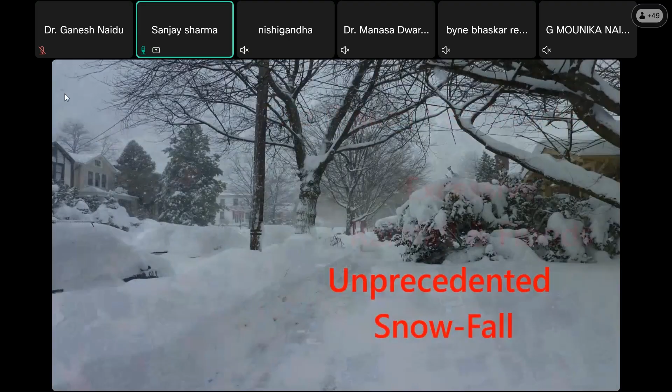...it is happening in a shorter period, so we are getting a lot of water, and that is not leading to providing a good city environment.

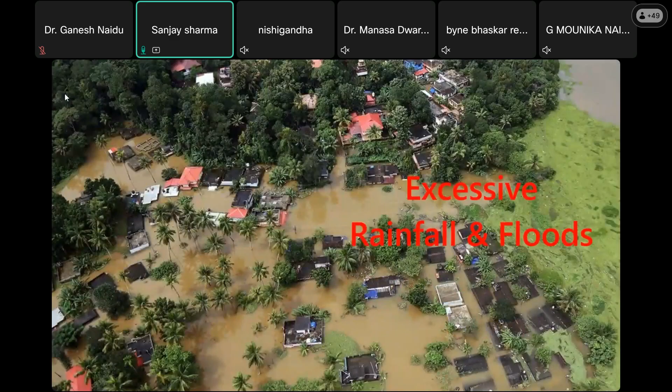Floods are very common in cities, and wherever fires and wildfires are there, I think the recent example of Los Angeles is in front of us. So we are experiencing intense heat waves, and that is what is happening.

Our global temperature now, even the news was there, okay, we want to bring it down by 2 degrees centigrade, but it will rise. It may not be possible to control.

With the US opting out and all that, it may not be possible to achieve the target of lowering the global temperature by 2 degrees centigrade. So that is the thinking.

We are having pollution, and burning of crops is a major issue, particularly in northern India and Punjab. We start hearing about this from October end, and it continues up to January end. It is all contributing to our lifestyle, where we have burning of waste, burning of crackers, and we are already experiencing huge acute water shortage.

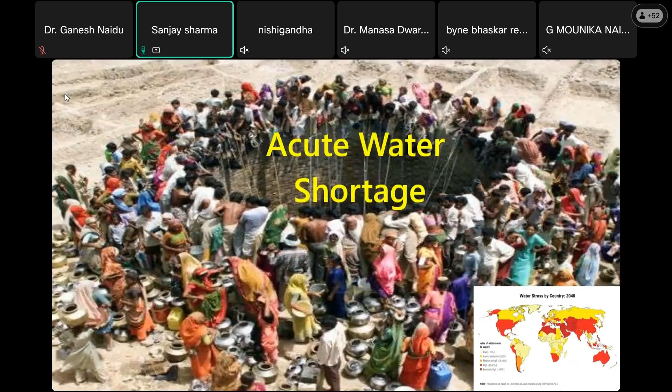The CO2 emission was very low in the late 60s or so, but it has gone very high. I think there is almost a 45% increase in CO2 concentration within a few years only. And India is the worst affected.

I think we have about 15 cities which are the worst cities with respect to air pollution in the world. Kanpur and Delhi are there, and this time Chandigarh, which is considered a very green and beautiful city, with the highest green cover as compared to any city in the country, was the second most polluted city in the country after Delhi.

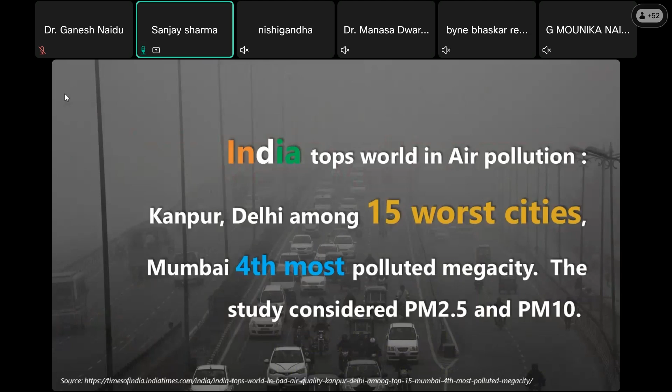So this is what is happening. It is not that we can control it by having one particular measure. I think a lot of things are required to be done.

Whenever there are some control measures, the building or construction sector is the first one to be stopped during that particular period, because of this issue. So that is what we want: cleaner water, cleaner air.

If you compare the Corona period, what was the condition during that time? It was very, very understandable that most of these activities are happening because of our lifestyle. We are doing that.

So it is our duty to protect the environment around us, and in that direction, automation or construction of green buildings is one of the things.

Green building means, I hope everybody understands what a green building is. A green building is nothing like just planting trees around the building and calling it a green building. No. Green building means we are taking a combination of measures.

And cities, you can see how big buildings, their construction practices and materials have changed. You can see different building forms, different multi-story buildings everywhere, high rise buildings. Same way in Mumbai, same way in Kolkata, every bigger city.

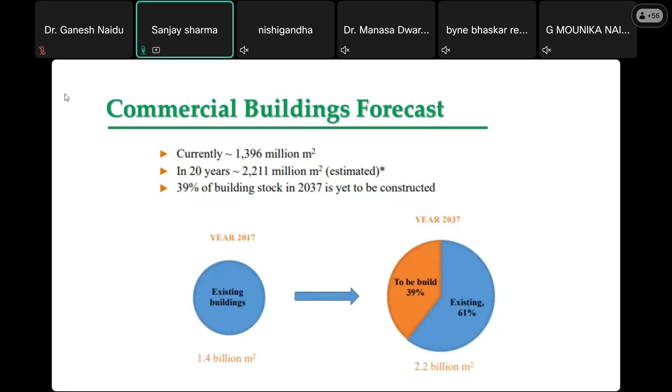But still, if we consider our building sector, we are still far away from our needs - only 60% of built area has been provided. Remaining is still to be built. 60% existing is there, but in another 10-15 years we need 40% more.

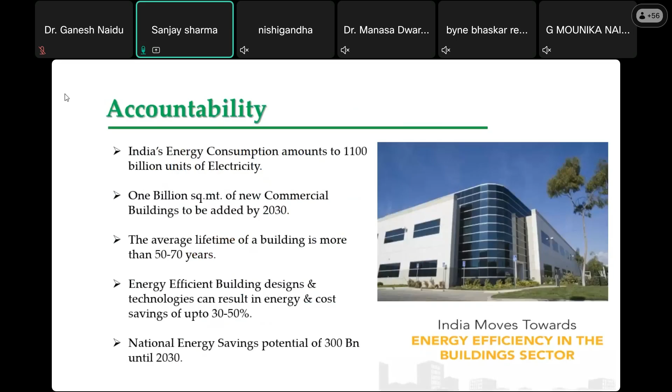This building sector is basically contributing a lot towards pollution, global warming, and carbon dioxide emission. So we need buildings which are energy efficient, which are green buildings, and there is responsibility for each and every person.

Policy makers, engineers, architects, civil authorities, government, NGOs, developers - all these persons are responsible for carbon dioxide emission in buildings, and their responsibility is to control that emission and go for green construction.

One of the parameters is automation, because if we are using AI in the building sector, that means we will be able to control things, predict outcomes, and adopt sustainable practices in building construction.

Energy efficiency is also one of the factors. Every country in the world has its energy codes, and in many places it is mandatory, in many areas it is voluntary, and mixed. In India also now, I think it is mandatory in many places.

If your electricity load or construction area is up to a certain minimum, they have already established codes and you cannot construct otherwise. Every state has its own ECBC code, because energy efficiency code depends upon the climate - so each climate zone, each state has come up with its own ECBC code.

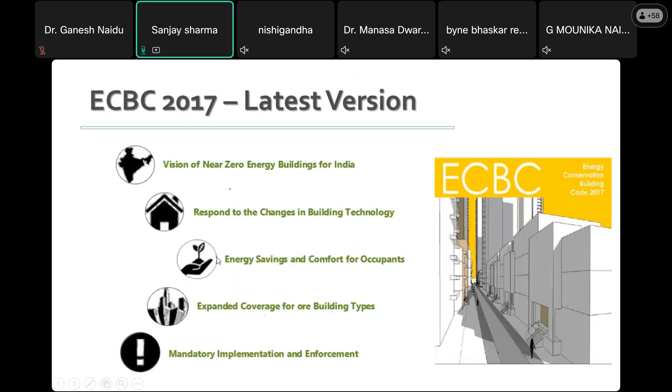The goal is to achieve near zero or zero energy buildings, where a building responds to changes in construction practices, achieves energy saving while providing good comfort to occupants, expands coverage for building types, and ensures mandatory implementation and enforcement.

The components of energy efficiency include the building envelope - fenestration, orientation, etc. - and comfort systems and control. It's important how you provide automation or use AI applications in buildings, how you control lighting, and what system you use for renewable energy sources in a particular building.

If we are saying photovoltaics are being used, I can give the example of Chandigarh city. Chandigarh city has already achieved its target of 30% energy through solar energy.

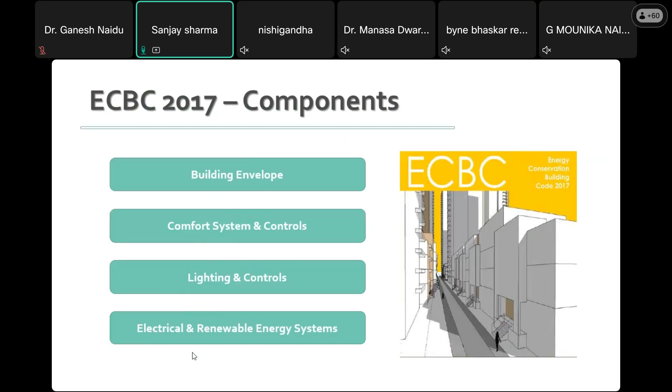It was to be done by 2030, but already it is going beyond that. Now almost every house is being provided with solar energy, and they have used a net metering system here. Whatever energy is generated through net metering goes to the grid, and then through net metering, it basically provides you the payback for the energy you created. So this is important that we do that.

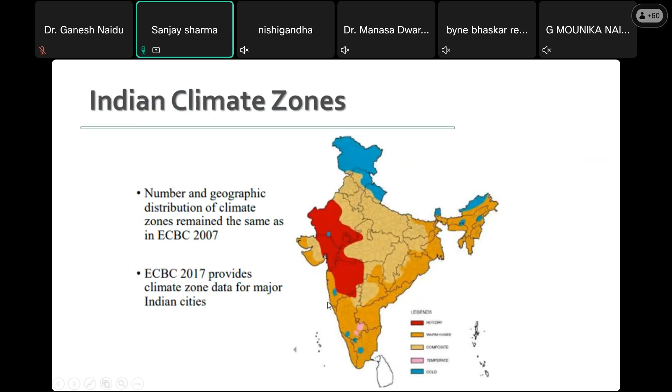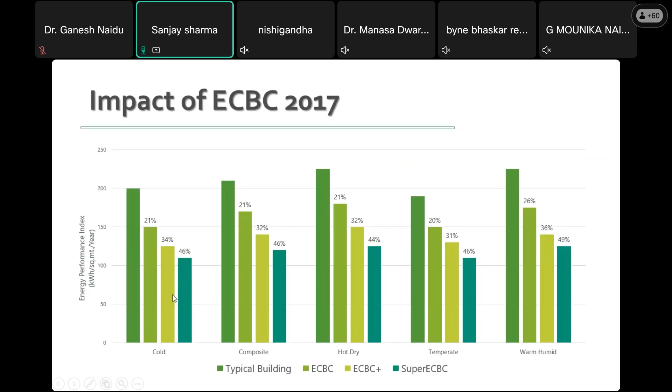And these are the five climate zones in our context. For each climate zone, you have your ECBC code. Every state has its own ECBC code, basically. And you can see that this scenario is changing. In all the particular types of climate, the ECBC-based building construction is going up.

So construction of green buildings, or sustainable buildings, if you define it, is the practice of increasing the efficiency with which buildings and their sites use energy, water, materials, and have reduced impact on human health and on the environment for the entire life cycle of a building.

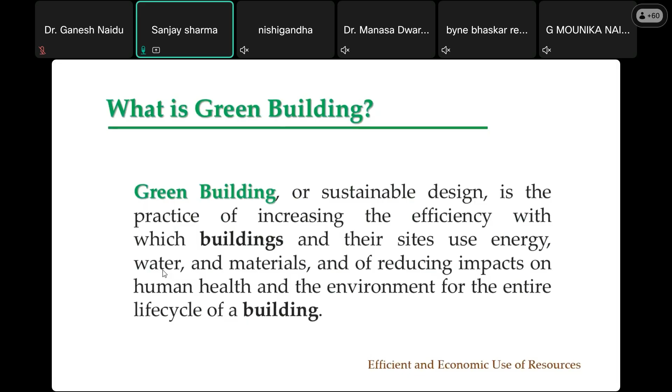So that means we want to have a building in such a way that it uses less water, optimizes the use of energy, at the same time conserves natural resources, generates less waste, and provides healthier spaces for the occupants.

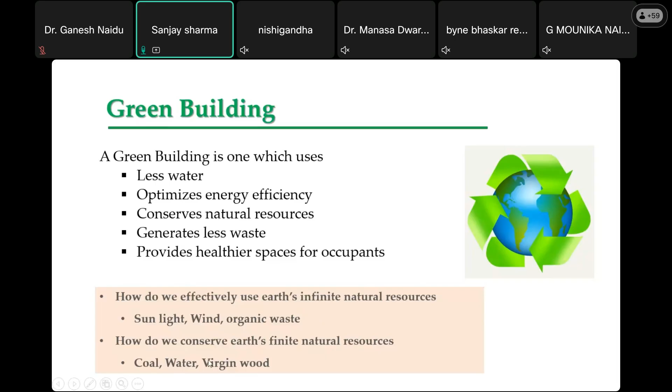So we have to see how we can use natural resources like sunlight, wind, or organic waste, and how we conserve resources like coal, water, and wood, etc., while carrying out construction practices.

So the benefits are: environmental benefits, social benefits, and economic benefits. Environmental benefits include improved air quality, reduced waste streams, and conserved water sources. Social benefits include enhanced occupant health. Economic benefits include reduced operating cost, tax incentives, they create, expand and shape markets for green products and services, and improve occupant productivity.

So many people ask, why should we do this, because construction of a green building is costly. Initially you may be spending more, installing solar panels, or if you have a multi-story building with water automation, those things add cost to the building construction. But the payback is about 3 to 5 years.

After that, economically you are positive. You are not spending anything on energy, and water is being recycled and reused.

If you look at the national building code, whenever you go for any multi-story or any building of a particular size, you have to show that your net water balance is zero. No wastewater - you are not allowed to get a connection to the sewage line. Whatever water you generate has to be reused in your locality only.

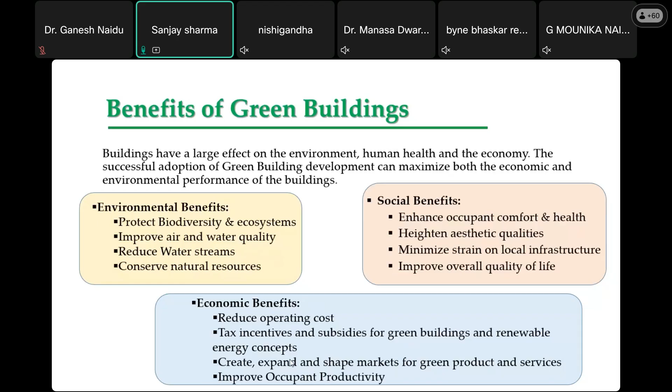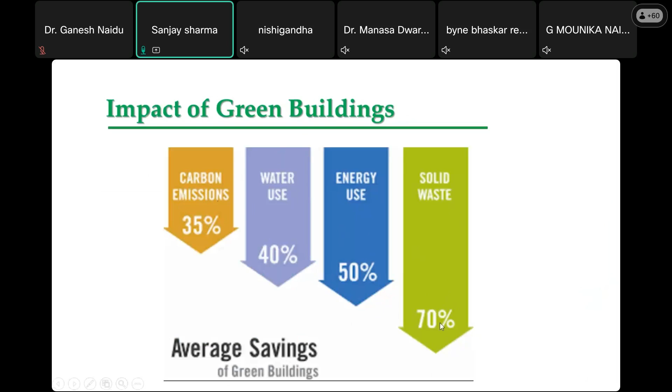The same thing is happening with energy also, everywhere. So green building means carbon emissions are reduced, water use is reduced, energy use is reduced, and solid waste is recycled rather than thrown into the system.

So you may have green homes, green factories, green data centers, group housing complexes, green interiors, green metros, green cities, green campuses, green townships, green existing buildings, and green healthcare, etc. So it's not just one particular thing - everything can be green around it.

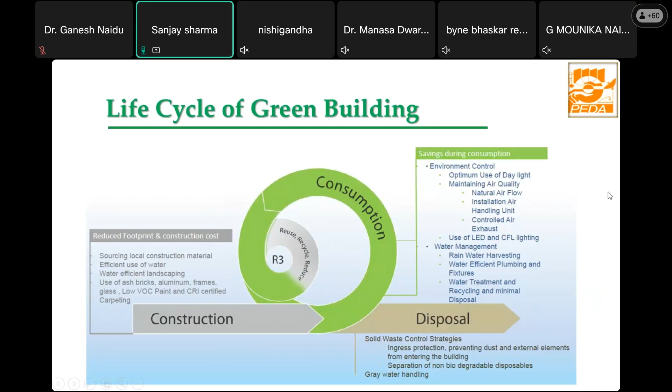So if you consider the life cycle of a particular building, here we are following the principle of reuse, recycle, and reduce. Whatever we are seeing in this, that is what we want in our construction sector and environment sector also. All those things are to be included.

Coming to the first parameter of green building construction, we want to control the site related parameters. Environmentally sensitive sites must be avoided. Sometimes you have an area near an eco-sensitive zone, so we have to take care of that also. Then we have to take proper precautions to prevent erosion of the soil, preserve the top soil, and ensure it does not cause air pollution or other issues.

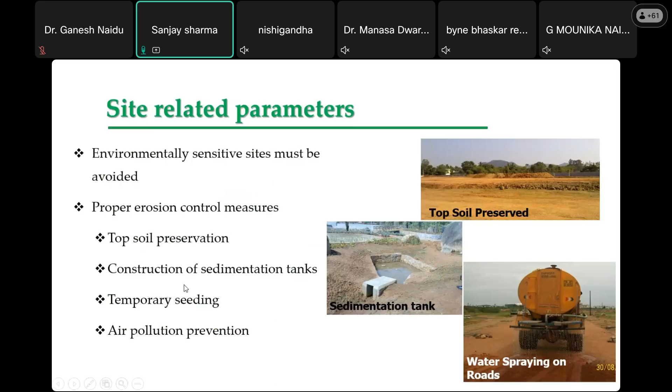So during construction, we are to take certain measures related to site parameters, and at the same time provide maximum open spaces, reduce impervious areas. This is a good thing, I think.

Also, one of the areas where I think intervention is required - most of the time we cover our areas with paver blocks, roads, or concrete panels. There, during summertime, you will find a lot of heat is being generated. So why not use materials which prevent the emission of heat from that particular surface?

Types of materials are available, like tiles which are pervious, allowing water ingress. There are also government funded studies on how to reduce the heat island effect in cities.

Now people are using AI and GIS - through GIS data you obtain temperature or weather data, and then you design how the airflow is taking place, and accordingly design your system so that heat island effects can be reduced to the minimum.

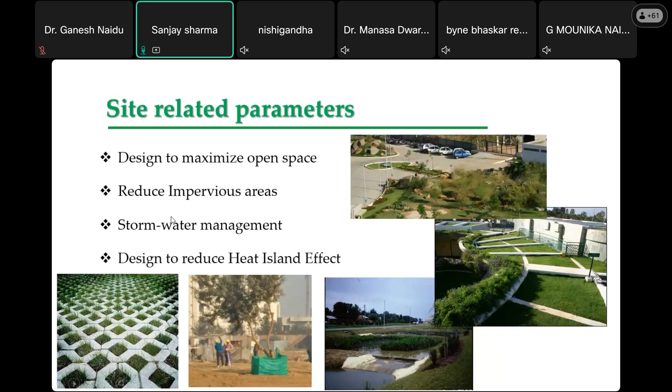So in that regard, every state has its own climate cell, and the climate cell's emphasis is basically on reducing the heat island effect in the city. No doubt other things are there, but yes, this is one of the major areas.

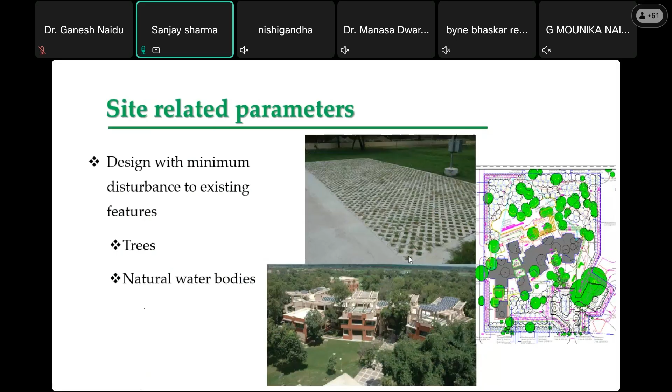So that means we construct causing minimum disturbance to existing features and provide good trees, and again preserve the natural water bodies and provide natural water bodies around as well.

Your second parameter in the construction of green buildings is water efficiency, which can be achieved by installing intelligent features into water management systems, like water sensor based taps, or providing irrigation with water sensitivity - having drip irrigation systems with installed sensors which can sense how much water is required in a particular green area.

I recently happened to visit Dubai, and there I have seen that it is a desert area, but if you go around the roads, you will find a lot of greenery and flowers there. What they have done is provide a drip irrigation system along the roads, and the water automatically opens whenever required, so nobody needs to irrigate that lawn manually. That sort of thing is required in our systems.

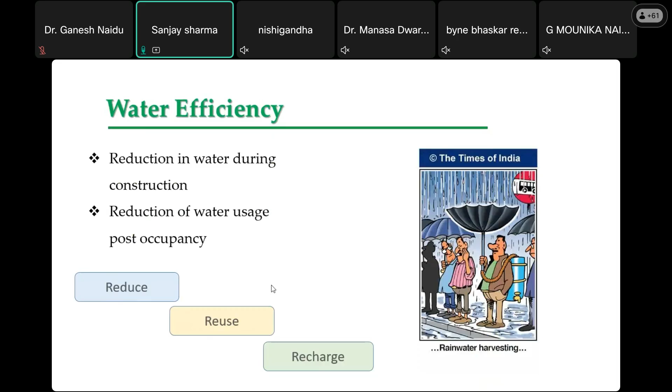Water efficiency is required, so use low flow fixtures and aerators in your system. Use a harvesting system, and provide the most efficient sewage treatment plants.

Then use that treated water for flushing etc. I think nowadays, as per code, you will not be given clearance unless you have a dual plumbing system installed in your building.

Then water efficient landscaping is one thing I mentioned - use drought tolerant species, and an efficient irrigation management system.

Use fixtures which help in conservation of water. Plant species which require low water, particularly depending upon your climate zone. And have a dual plumbing system.

Provide wastewater collection, and reuse that water. So whatever you're seeing, achieve zero balance in this thing - water efficiency during construction also.

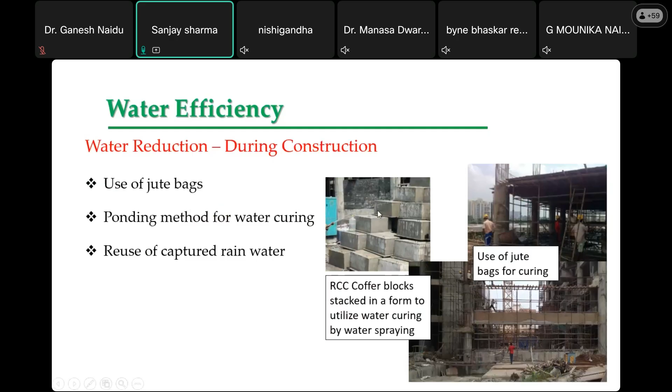I think nowadays you are allowed to use only treated water for curing. So adopt the ponding method, or use captured water, and at the same time use similar systems during construction also.

We can use that also. So achieving water efficiency involves control on site selection, then reducing water use through different means.

Go for automation in the water control system and audit also, so you can achieve water efficiency in the building.

Then energy efficiency, we all know it is important. Basically energy is seen in two systems: passive control, and installing non-conventional sources of energy at the site.

In passive measures, it may not always be possible, but building orientation by studying the sun path is important - which side you require sun to enter, and during which period you want sun to enter.

That particular thing is studied. Most architects may know about this, but also control the building envelope - have proper shading, and use high performance glass in the building.

Use the proper type of walling system, and have a good efficient roof also. Then installation of energy efficient HVAC equipment is important, use renewable energy, and use efficient artificial lighting design also.

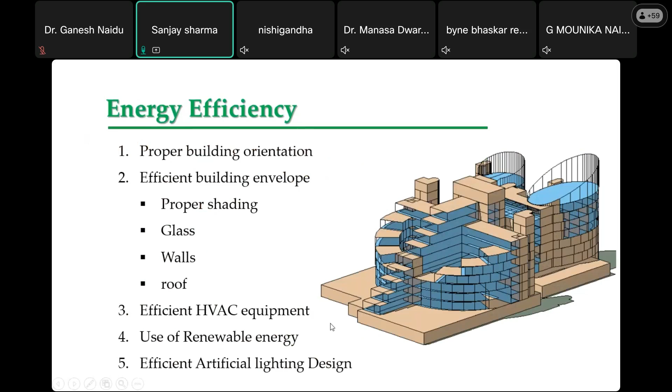That can also come through the automation part. Then materials are also important, because we use lesser natural resources and more recycled material in our construction.

So use recycled content, locally available material, and also rapidly renewable materials like bamboo, etc., wherever possible.

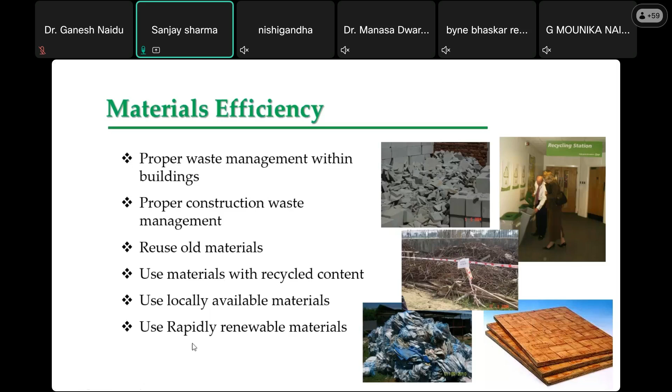Waste management is again one of the issues we should take care of, during construction and after construction also.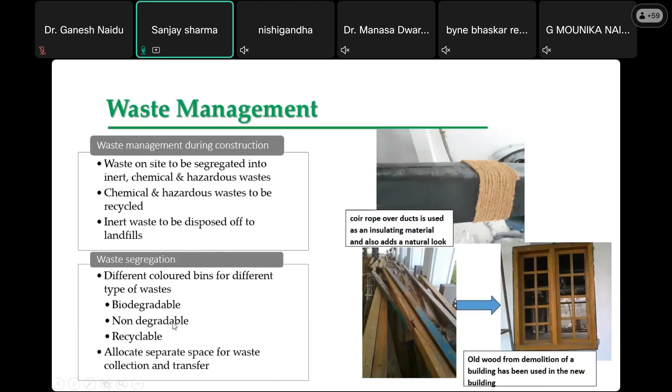Wherever things are there, it's important nowadays to have different types of waste collection systems - recyclable, biodegradable, non-biodegradable - all these things need to be taken care of.

And then have the system for indoor air quality, that's important here. Have good clean drinking water and proper toilets - these are for this thing.

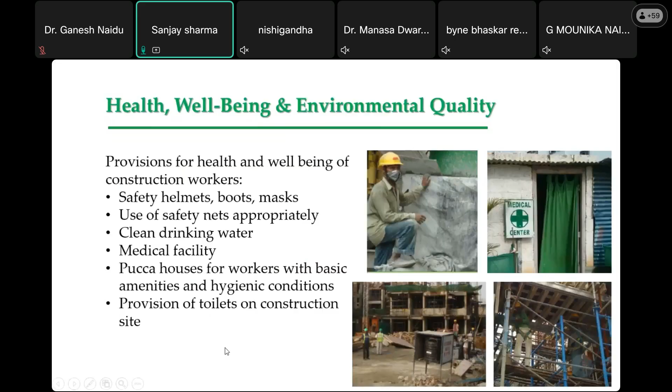So that is what we're talking about with green buildings. We have different green rating systems available, like Griha, which is a 1 to 5 star system, GEM, which is 1 GEM to 5 GEM, and IGBC is certified silver, gold, platinum, and LEED is also certified silver, gold, platinum.

In these systems you have different points to be achieved, maybe 100 points total. Griha is a 100 point system. Site selection is given certain points, like 6 to 10 points, water efficiency has about 15 points, material efficiency has 25 points, energy efficiency has another 20 points, and the remaining points go into indoor air quality.

So in that system, electrical automation may be worth 1 point, water efficiency automation may be 1 point, and construction practice also counts, meaning what materials and construction practices you are using. Nowadays we have 3D printed houses also.

One of the colonies constructed by a border organization has been built using this - the first one, maybe in Chandigarh. I think you've seen the particular post office constructed in Bangalore city, which was the first 3D printed post office. Here also, the border organization in Chandigarh has constructed one colony whose construction was carried out by adopting 3D printing practices. Now people are working on this particular technology as well.

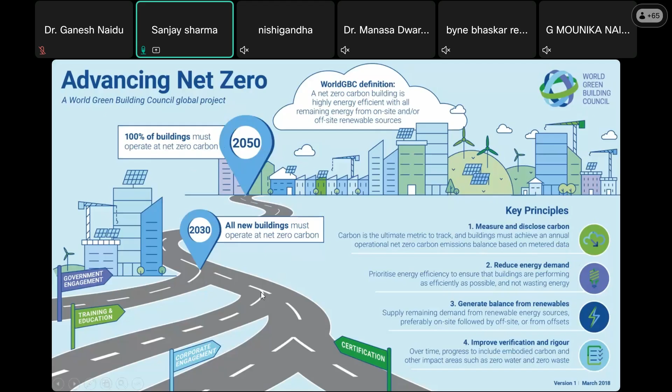So that is what net zero energy means - you have your highly efficient HVAC, lighting, appliances, construction etc., all included. Provide a balance with energy systems and renewable energies, and achieve net zero or net positive.

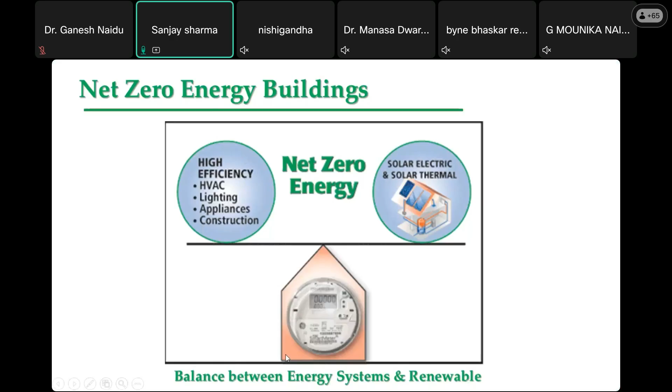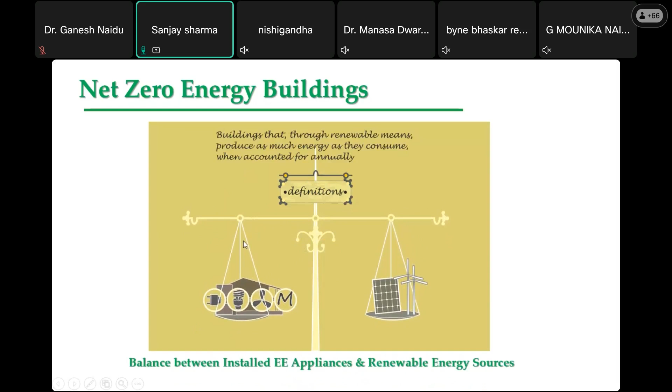So basically we have to achieve a balance between development and energy use. Buildings that through renewable means produce as much energy as they consume - that is what we call a net zero energy building. We are not depending upon energy needs from outside. So achieve that balance.

So you have to look into all those things - your load, your lighting, your HVAC, what renewable energy sources you are using, and achieve that particular balance.

So one of my PhD students, he worked on this and was the first one. There was a building, maybe mentioned subsequently, constructed in Ludhiana, built as a net zero energy building. We developed parameters which included energy automation, energy through thermal energy.

Not just photovoltaics and solar energy, but even thermal - there's also control on how to control the HVAC system, etc. All those things were considered. So he developed a sort of equation for how to design and what parameters are to be considered in the design of a net zero energy building.

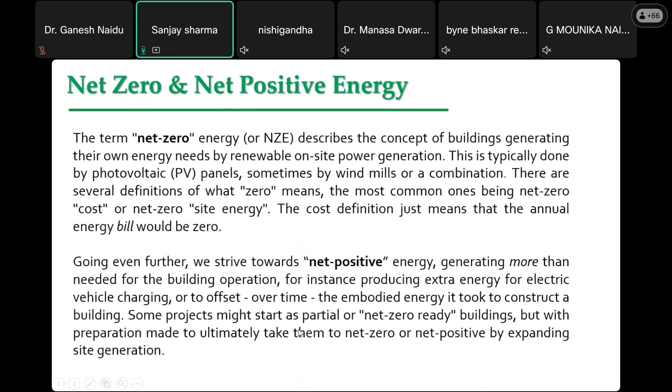It describes the concept of a building generating its own energy needs by renewable on-site power generation, maybe achieved through photovoltaic panels. So we strive to achieve this net positive energy system of a building.

You may get a lot of this. Basically, all the landlords, developers, tenants, suppliers, etc., have to play their role. A net positive sustainability strategy lies in accurately defining each property's electricity use, carbon use, water use, and setting

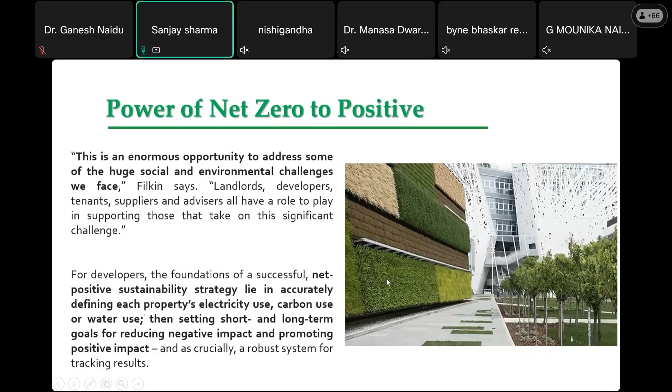short-term and long-term goals for reducing negative impact and promoting positive impact. It may not be one measure, it may be a combination of many measures. To achieve that, you have to consider the climate zone, how much heat is being generated, in which direction, and what type of cooling system you require in summer. Also consider the paved area, how much green cover to be provided, in which direction, what is the direction of the wind, and how natural ventilation can be enhanced.

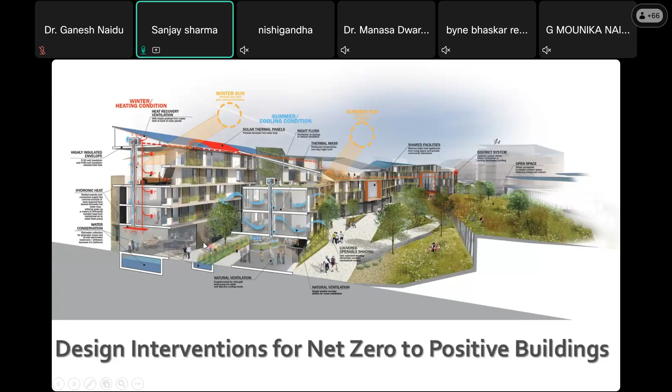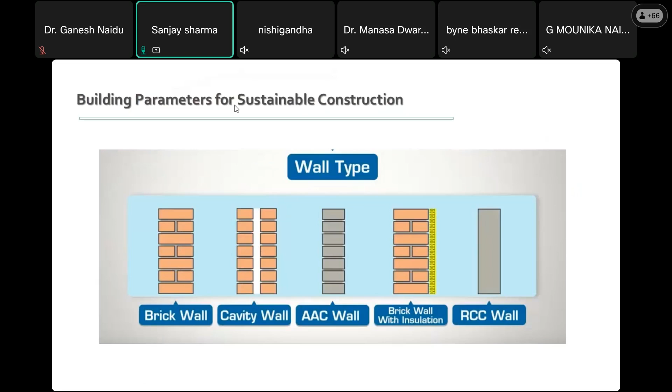All those things are to be included into your building construction system, and that is what gives you proper orientation. Select the proper type of material—it may be brick wall or cavity wall, AAC block, brick wall with insulation, or RCC wall, whatever you think is suitable for that particular area.

Consider the U value of that material. For that you may have to think about the window system, the glass system—high performance glass to be installed. Recently one building here was awarded for this: a small house, 10 marla, 250 square yard house, that was awarded because he adopted these measures and was given the certificate of zero energy building.

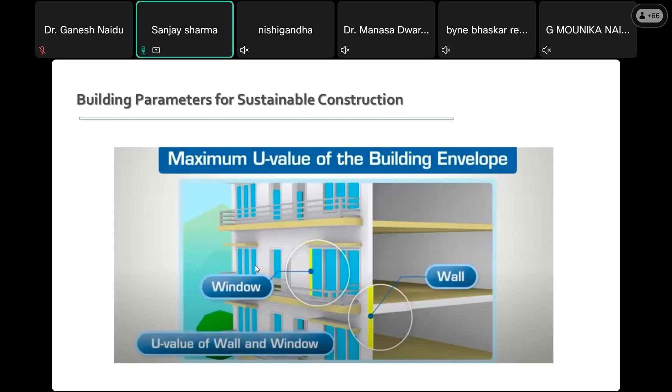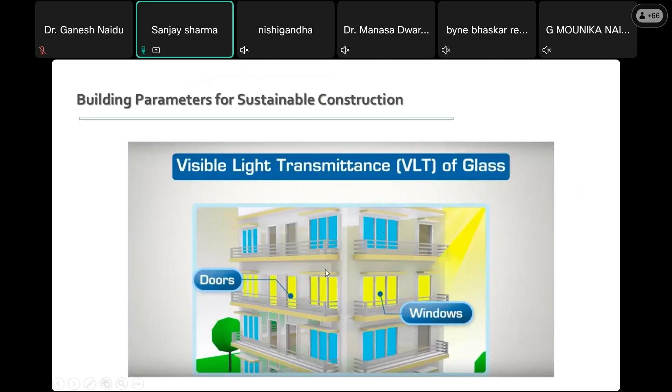So he adopted all those measures there. You have to see whether single glazing or double glazing is to be adopted depending on how much light you require to be transmitted, so transmittance is important through windows, and daylighting is to be improved.

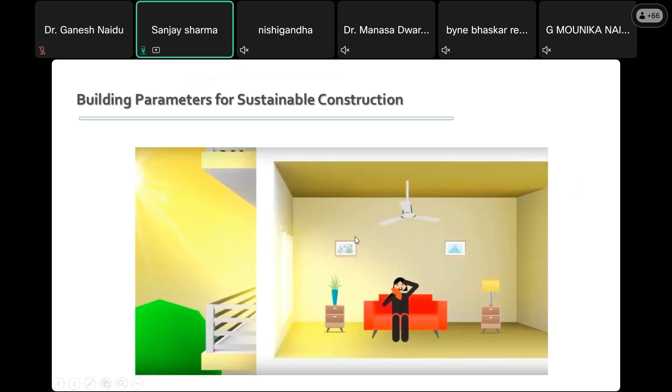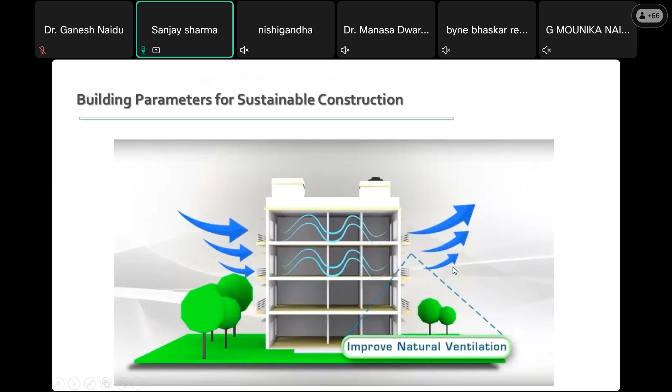Then, for inside comfort, what type of material you are using for construction matters—inside temperature should remain between 25 to 30 degrees, the comfort zone. Consider natural ventilation, air direction, which type of trees are to be provided, and their heights—all these things need to be included. Then what is the limit of heat gain and heat loss, because that again depends on the climate zone.

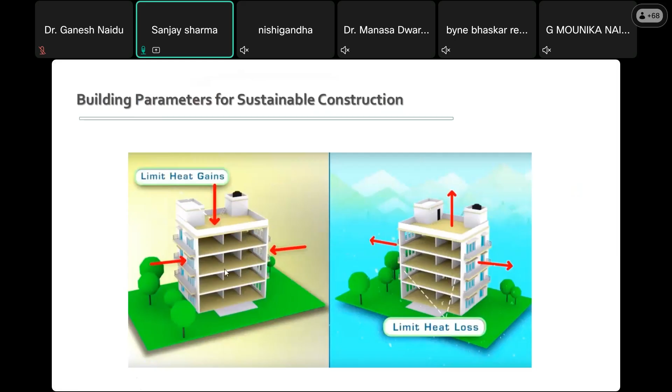During winter, if the inside is hot, it should not be allowed to lose heat. At the same time in summer, the gain inside should not increase the temperature. So those sorts of things are to be installed. Solar panels we already saw. Building type, building blocks using bricks, AAC blocks, using some insulation material, etc.—all those things matter.

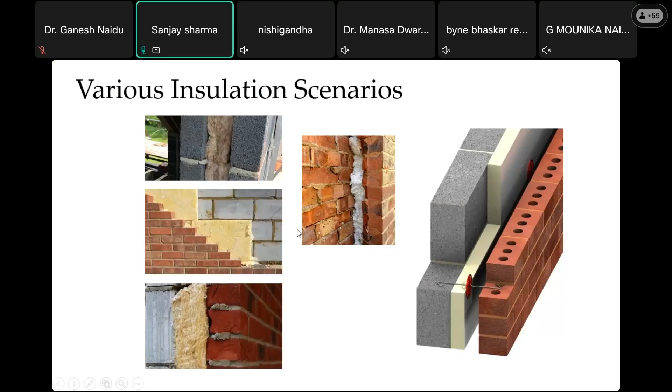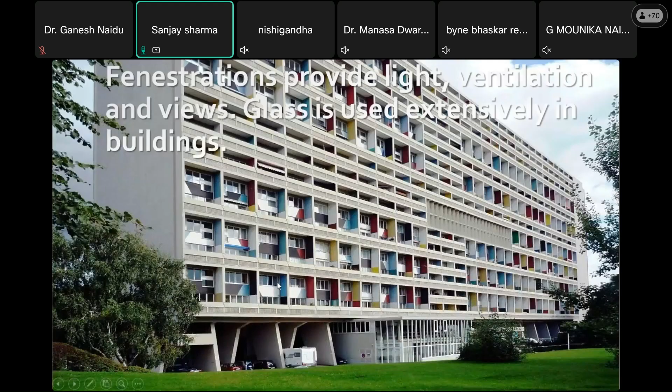Cool roof is one of the things considered nowadays. Fenestration is important—where to provide windows so that light can enter but heat does not, and what type of material is to be used. All those things involve the double glazing system.

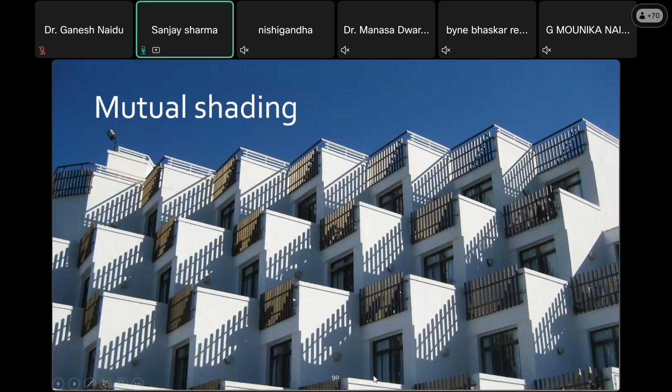Then mutual shading, that is a design aspect too—you can call it fenestration, architectural design. So recommend what are the like...

You provide control over the lighting system—automatic lighting controls, internal and external. You provide occupancy sensors, daylight and motion sensors, astronomical time switch, and photo sensors.

Maintain a minimum lighting power density and have separate controls for separate lighting. Also use recommended LED fixtures. Nowadays you can get bulbs that can store some solar energy too, so use that sort of appliance in your building. That is also a different side of this.

Then also the HVAC system—variable refrigerant volume systems should be provided. Chiller and other centrally air conditioned systems should also be of proper rating, along with district cooling system, radiant cooling, or geothermal cooling.

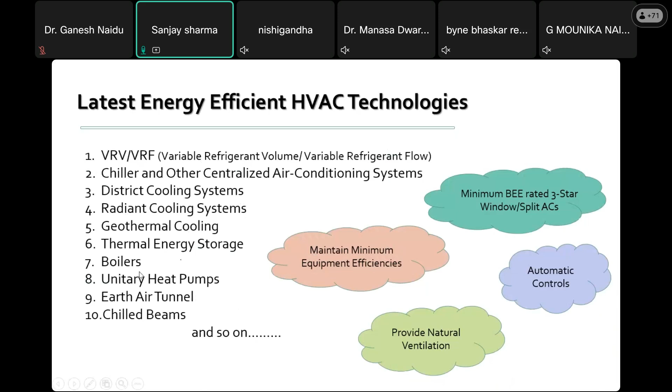So all those things, when we design a building, we consider all those systems in particular. It may be absent in one particular building or system, so we have to see that. Energy balance has to be provided. So once you develop this, you provide air channels and think of things that can be provided, and by having automation also, because automation is important here in energy efficiency, and water efficiency is very important there also.

So energy saving tips etc, then ECBC compliant and all. So basically your external heat islands have to be controlled. Then renewable energy integration.

Even this particular example is there not just in building systems, but in the canal system also, like in Gujarat it was done, but in Punjab also it has been done basically.

So these are a few of the buildings which are intelligent and automated in the country. You have the Paryavaran Bhavan of Environment and Forest Department, and the Indira Paryavaran Bhavan, which is again almost an intelligent and automated building, provided with a five-star rating system. This is the first such net zero building in India, constructed by CPWD and occupied by the Ministry of Environment, Forest and Climate Change. This is almost a net zero energy building.

India Habitat Center in Delhi also is a five-star Griha rated system. Not net zero, but yes, having the five-star rating system.

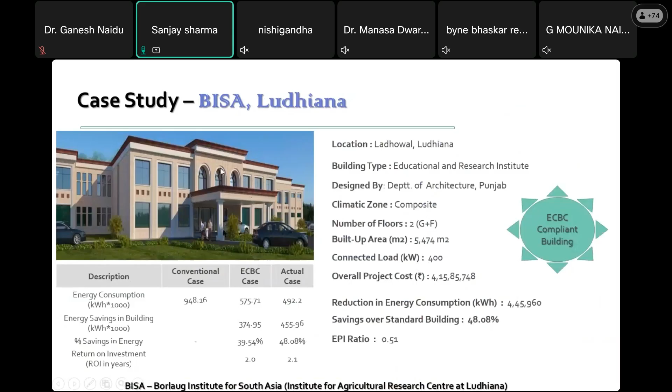This is one particular building in Ludhiana, BISA. It is an ECBC compliant building, a five-star rated building, and it meets all the parameters of an intelligent and automatic building.

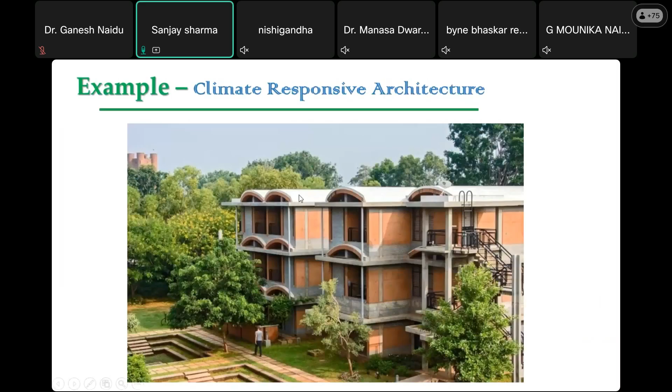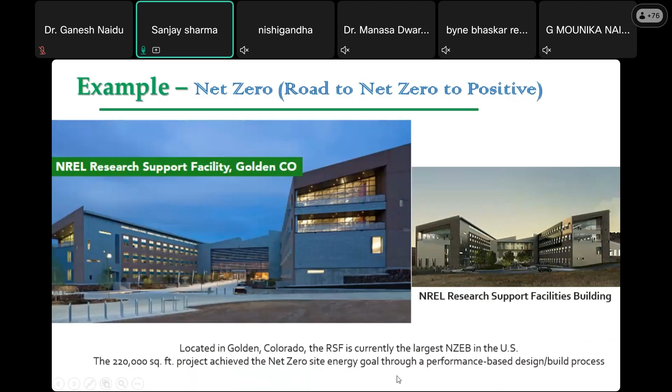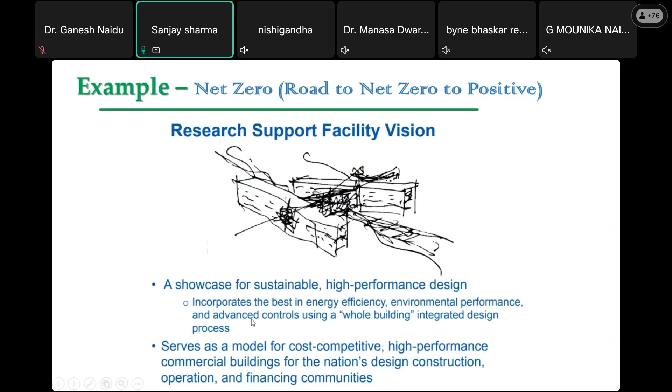So when we go for this, you can go for this design of a net zero building, which incorporates the best in energy efficiency, environmental performance, and advanced control using a whole building integrated design process. So go for this particular design, which will include all AI applications into it.

That is why we should go for performance based design building, because it encourages innovation, reduces owner risk, faster construction, better cost control, makes optimal use of team members, and establishes measurable success areas.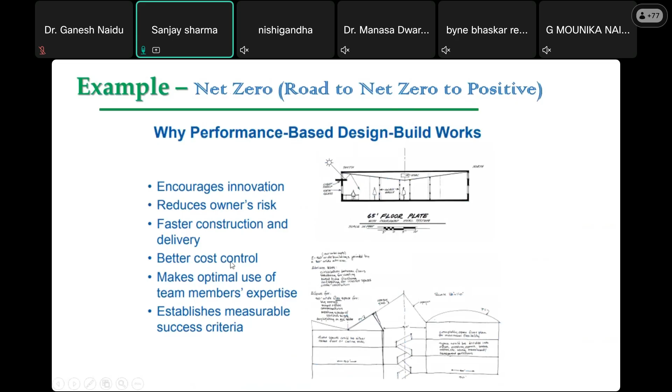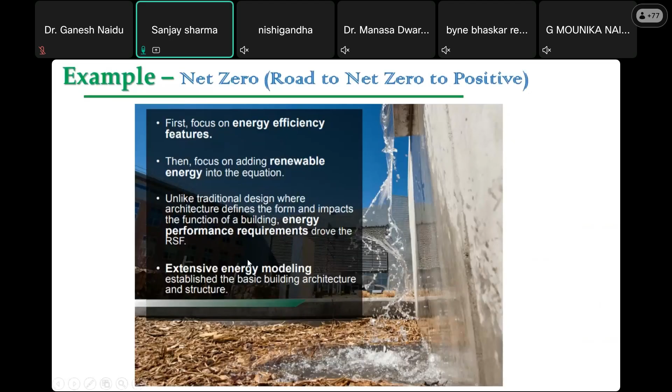So focus on energy efficiency, then focus on adding renewable energy, then focus on having automation into this, and provide a model for this. Architecture features also included.

So you have to consider daylighting, thermal mass, natural ventilation, etc., and control on that also. Thermal mass means taking care of the material being used, which should have a good proper U value, depending upon the location in which you are located.

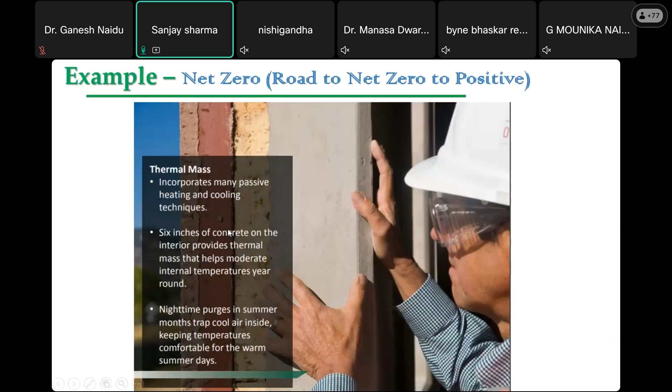Natural ventilation is again important, so you can go for automatic windows that can be controlled and operated depending upon the daytime.

Like you may have seen in planes, they have a window system. Depending upon the need, you can have control there. You can allow the light to enter, or you may put a setting where it doesn't allow the light to enter, so it becomes dark, by this system only.

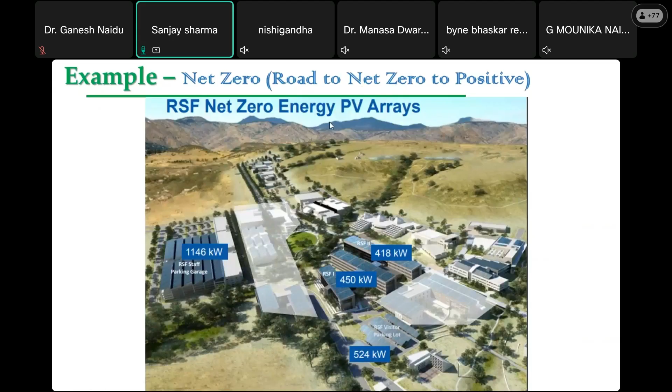So this is what you have to do, install intelligent systems here also, and go for this installation, net zero energy. This is another campus.

So small things can be more efficient.

Solar panels are also based on the movement of the sun. They have automation control, so they rotate in the direction of the sun. You have less window area while still fully managing the daylight.

A larger transpired collector creates more free warmed air. Better thermal breaks in the window frames, leveraging the latest commercial windows and aluminum frames, drive down energy consumption and increase comfort. Displacement ventilation in conference rooms improves thermal comfort. Natural passive cooling in the stairwells, and daylighting controls wherever required.

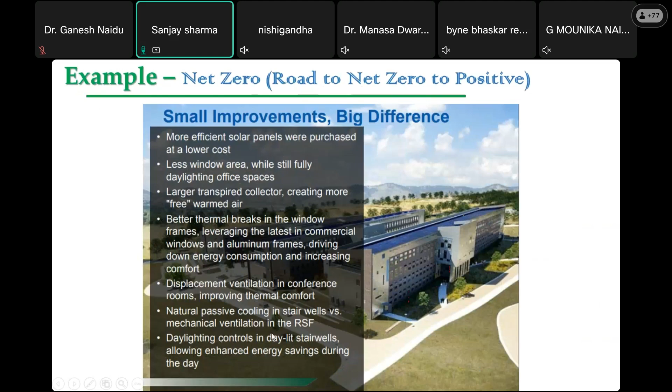So you go for energy modeling using tools. eQUEST is one you can download, it is freely available. You provide all the data - whatever material construction, whatever solar energy you are using - and it will give you the energy balance for that particular building.

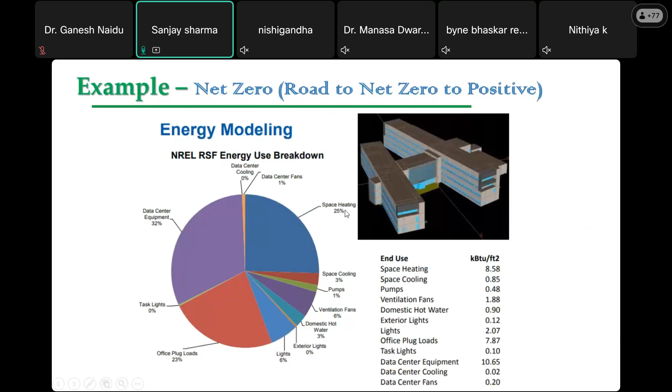You see how much space is required for heating, how much for cooling, what type of pumps, ventilation fans, water heating system, lighting, and equipment you are using. All those things can be modeled, so energy use can be properly controlled.

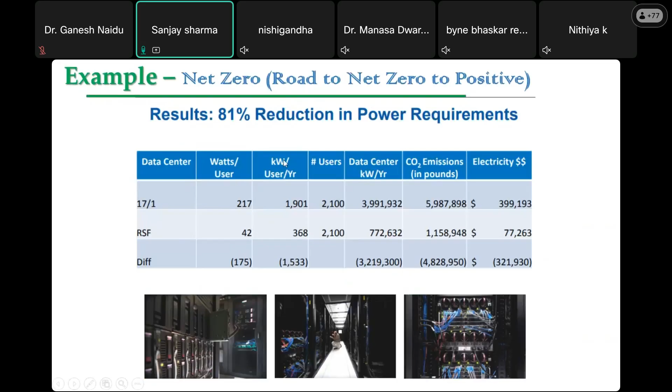So you can see, this example taken from here shows an 81% reduction in power requirements by having these systems installed in the building.

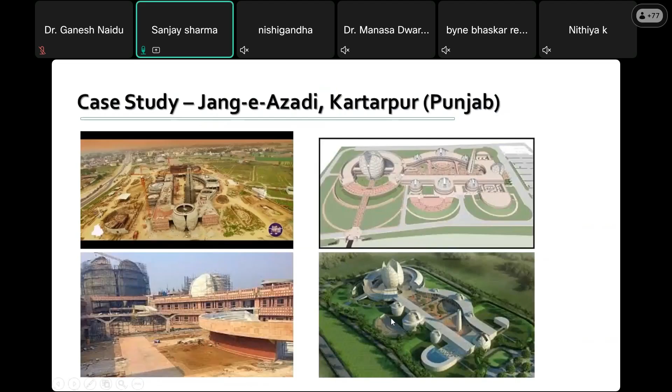Another example is in Kartarpur, where they constructed the Jang-e-Azadi Museum, also adopting intelligent systems into the building. It has a building envelope with cavity walls and proper insulation. The roof has heat reflective tiles with a false ceiling, and a glass system with UPVC has been provided.

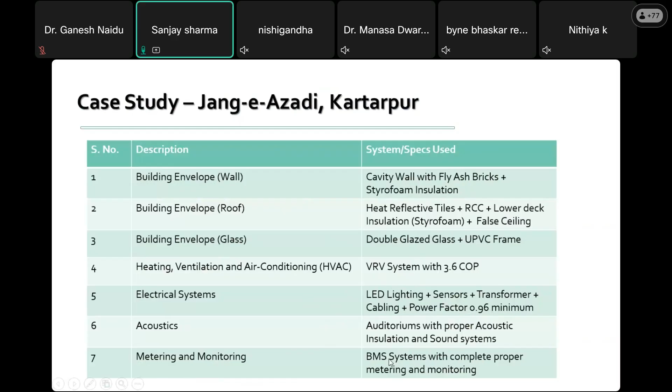A proper air conditioning system, which is a VRV system, has been provided. Electrical systems include LED lighting, sensors, transformers, and cabling. Acoustics has been done properly, along with monitoring of systems, like a BMS system used for complete control.

This is a 5-star rated building in Chandigarh - you can see its design. During daytime you don't have to keep lights on, and there is no refrigeration-based air conditioning system installed in this building.

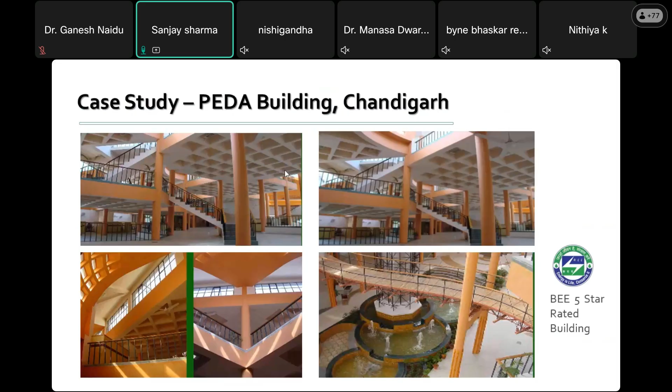Even when outside temperature is 42 degrees, the inside temperature remains well controlled, staying around 25 to 30 degrees. With the fan, you achieve a good cooling effect. This particular building has also been used in many films for that purpose.

This is the HAREDA building, like Haryana Energy Development Authority, that was PEDA. This is again a Griha 5-star rated building, which has also adopted all these systems.

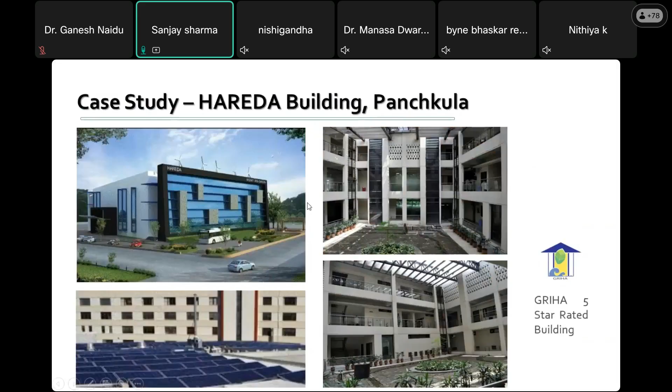We have to go for this proper energy approach - follow proper integrated design, implement ECBC in design and construction, involve the support of each stakeholder, and integrate sustainable design with renewable energy so that you can achieve energy efficiency, construct a green building, and make it climate responsive.

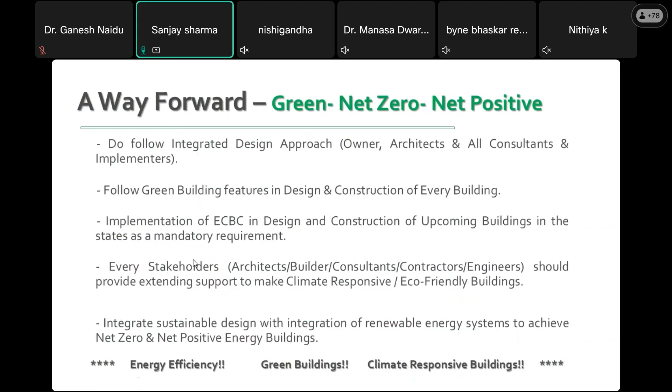In the near future, whenever we design buildings, we have to consider this. This futuristic approach may give us a good design, and this is what our buildings may look like in the near future.

This will require all these systems to be installed into our building construction practices, and later during operation of the building we also require automation and all those parts.

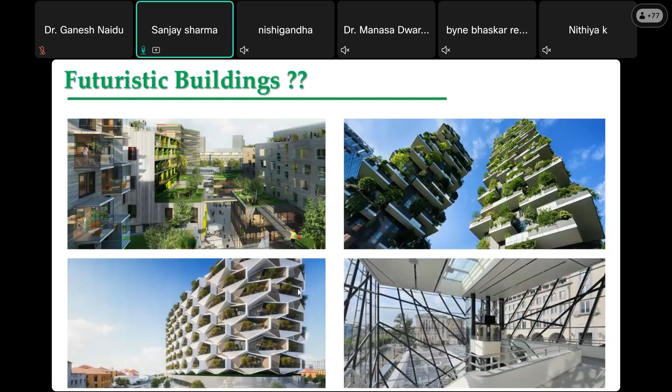Different features and different types of buildings may exist in the near future, but it's not that such practices were not there before. In India, we have good practice of old buildings - Hawa Mahal is one you can call a naturally air conditioned building.

So you have what green features have been provided. Some material has been used which doesn't heat up, and this is important that we go for this. So that is what, in order to save our planet, we construct green buildings, environmental responsive buildings, and wherever required, automation is important in each building.

So that is what, for sustainable practices, you include your energy conservation, water conservation, and installation of energy systems and solar panels, maybe charging stations are to be provided also.